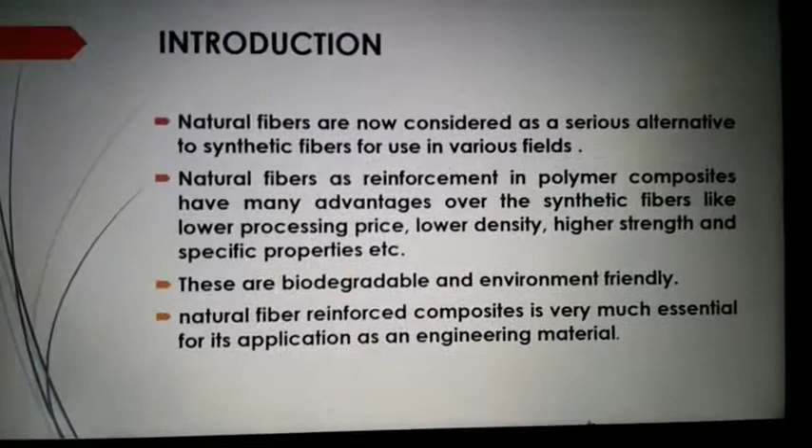Here is the introduction. In this introduction, we are going to get knowledge about natural fibers. We also know that natural fibers are a serious alternative to synthetic fibers for use in various fields.

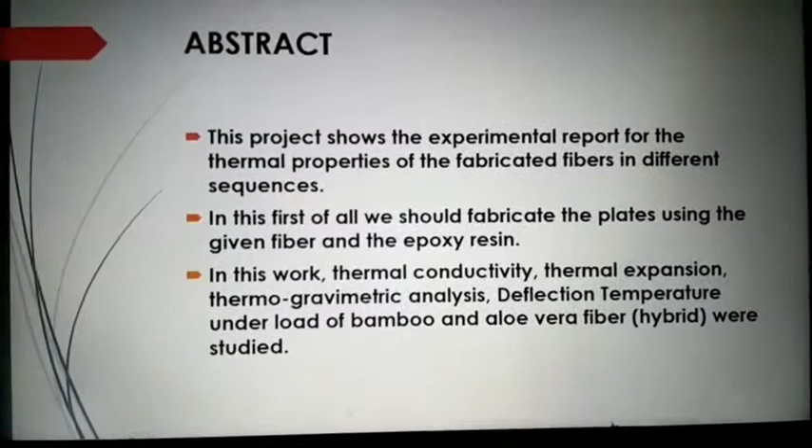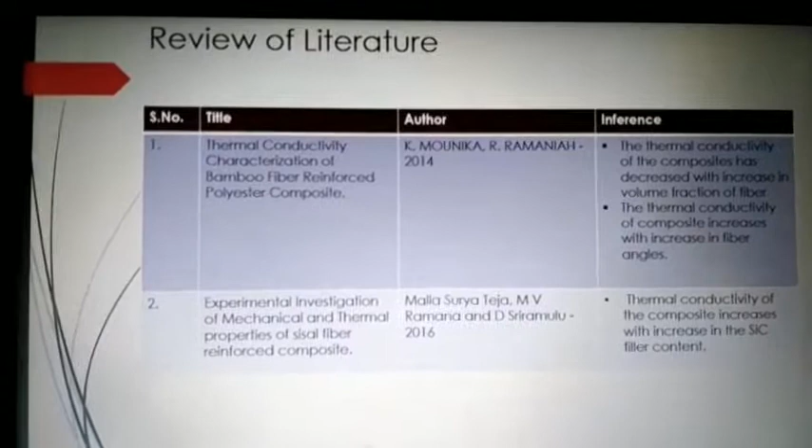Here is some survey we did on composite materials, like conductivity characterization of bamboo fiber reinforcement polyester composite by K. Mounika, R. Ramaniah, and others like this.

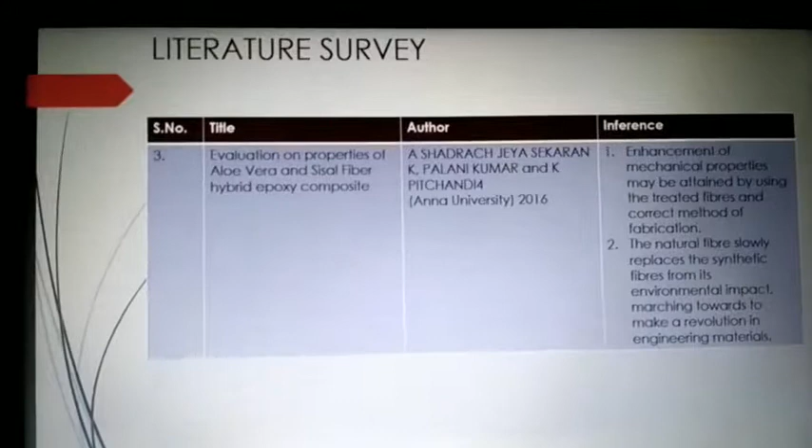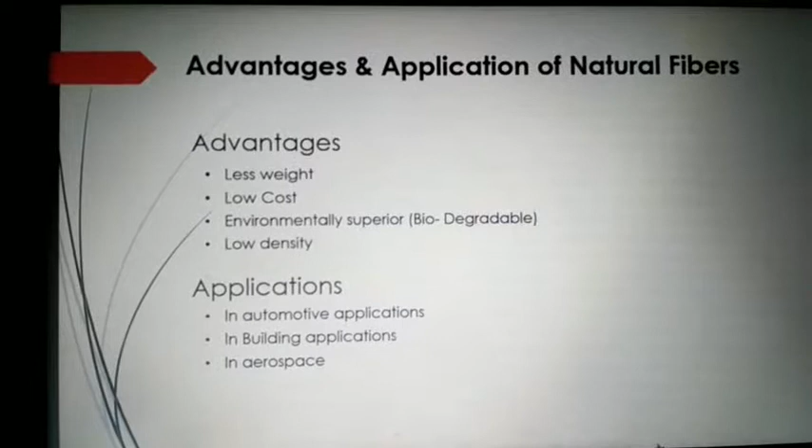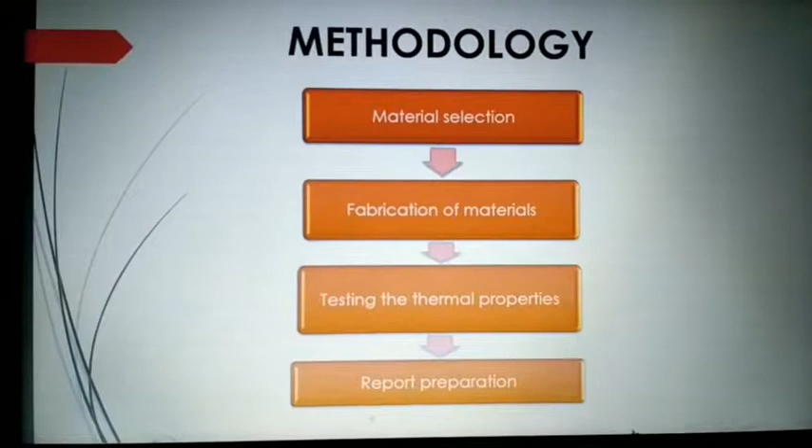And we are using hardener. Then after this, we had fabricated by the help of a mold, and the testing we had done.

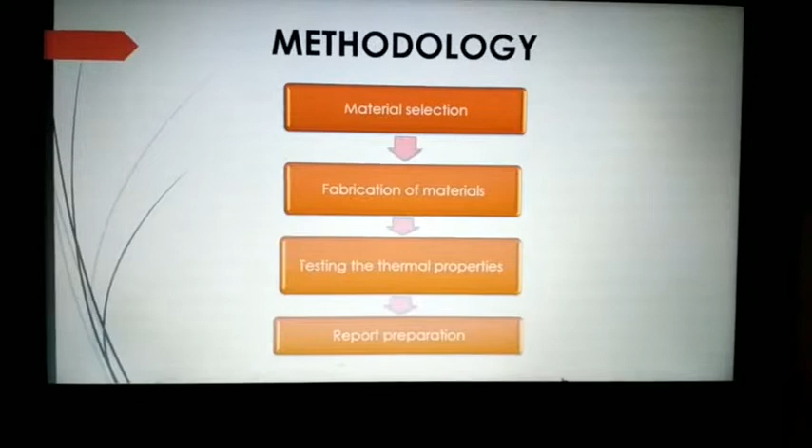There are four thermal tests we had done: thermal conductivity, thermogravimetric analysis, thermal linear expansion, like this. And then we have prepared the report.

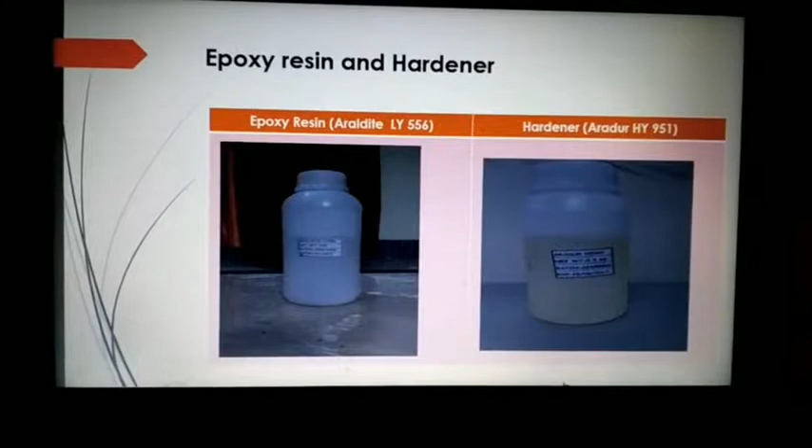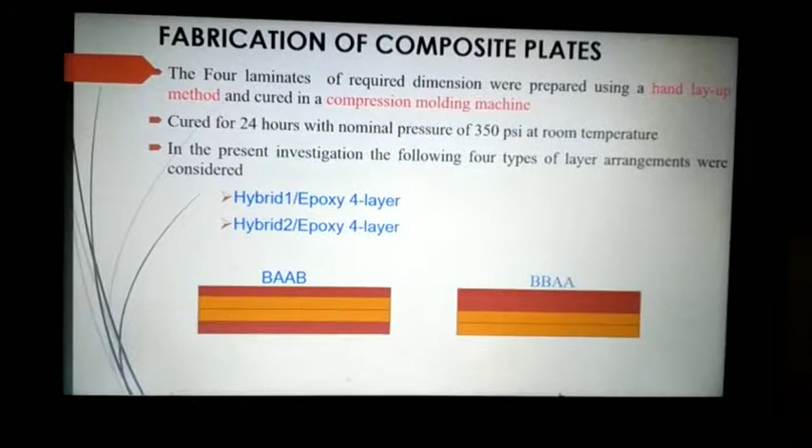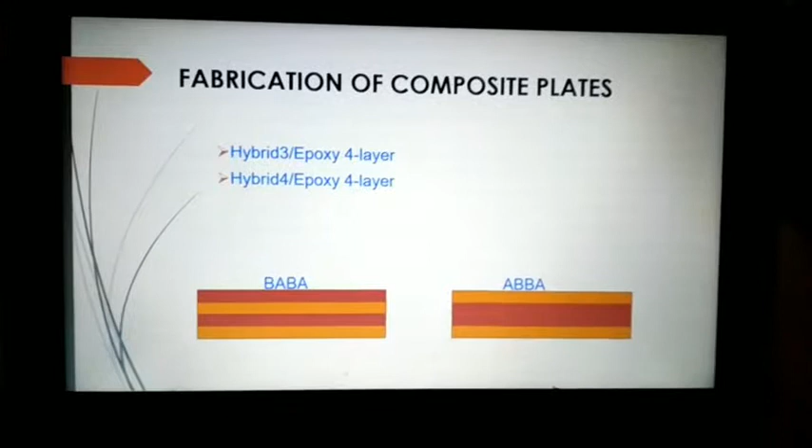Actually, we made four compositions: one is BAAB, one is double B double A, one is BABA, and one is ABBA. Here A denotes aloe vera and B denotes bamboo.

And we did the fabrication by the hand lay-up method. Here is a diagram for the hand lay-up method.

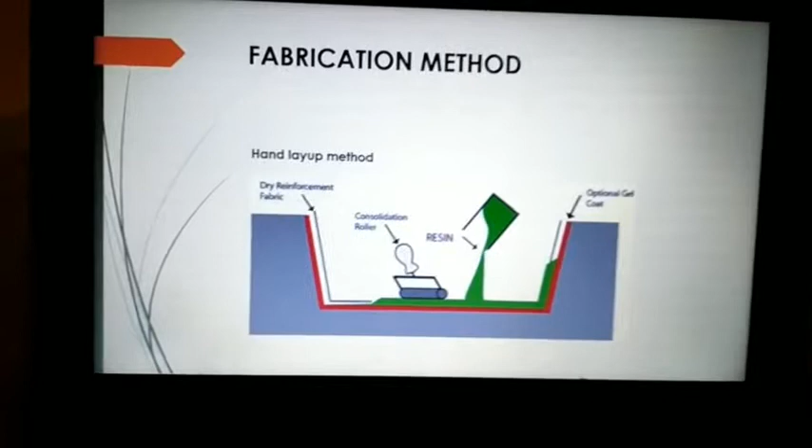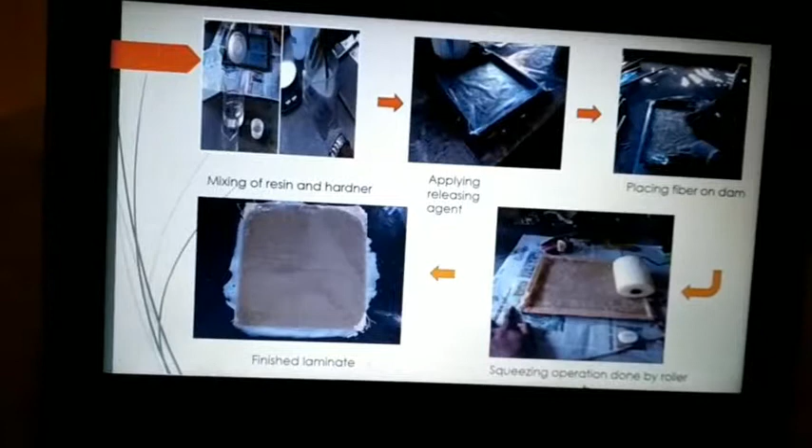And these are the various steps for the making of the material. Here first we mixed hardener and resin.

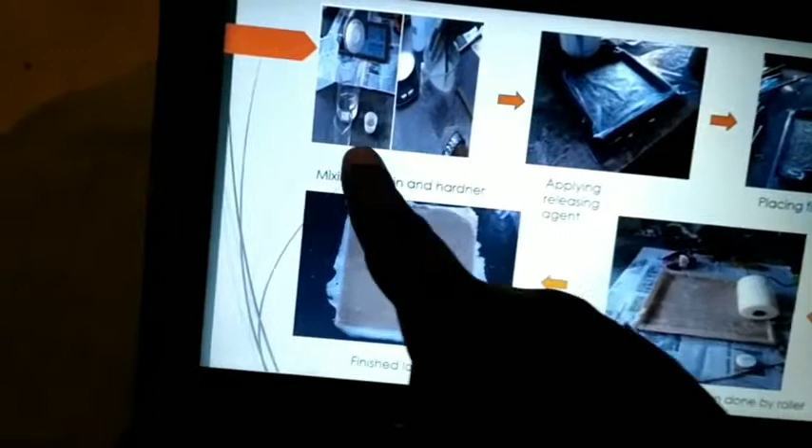We made it by the rule of mixing, meaning we are using 10% hardener, so 10 is to 1 ratio we are mixing it.

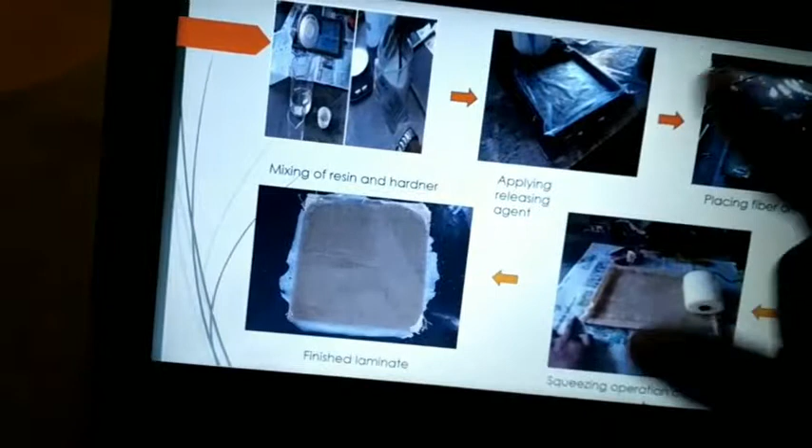Then first of all we take the mold and we are using a laminate sheet, then a releasing agent, and then we are putting our sheet, and then on the sheet we are putting the mixture of hardener and resin.

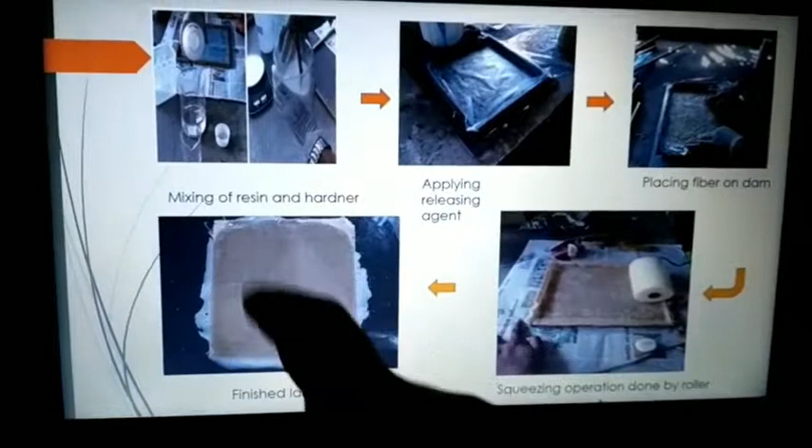And after that we are getting like this, and then with the roller we are fixing this. This is a pic of our mold.

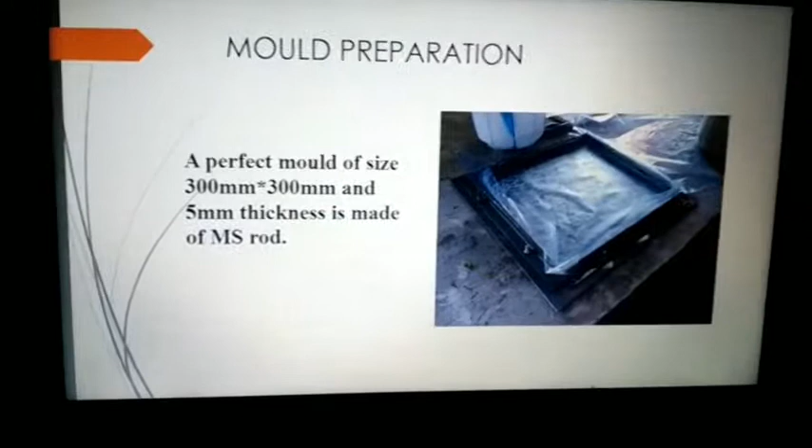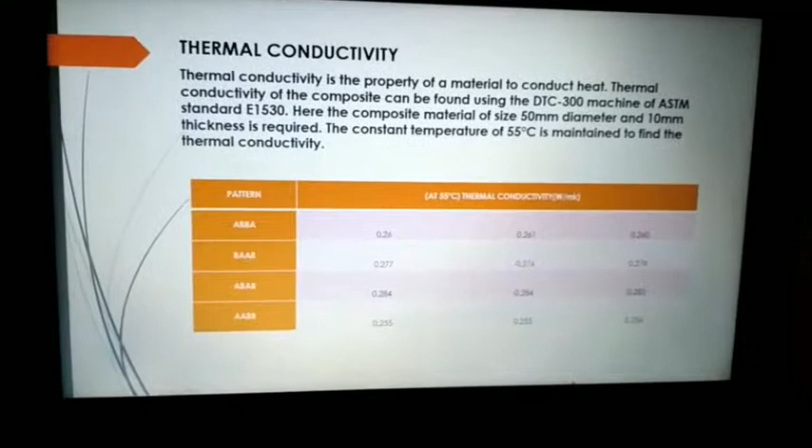And this is the result we got. Actually, we had done all these tests in CIPET. We got the result from CIPET only.

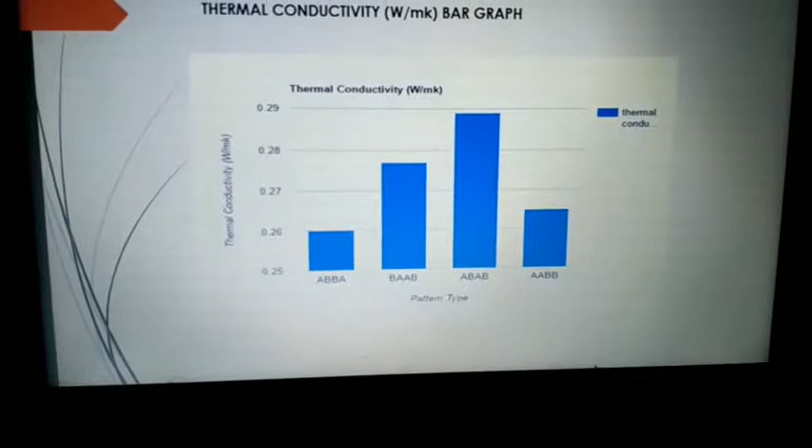This is the thermal conductivity result for different materials, and we drew a bar graph also. Here we can see that ABAB has the maximum thermal conductivity.

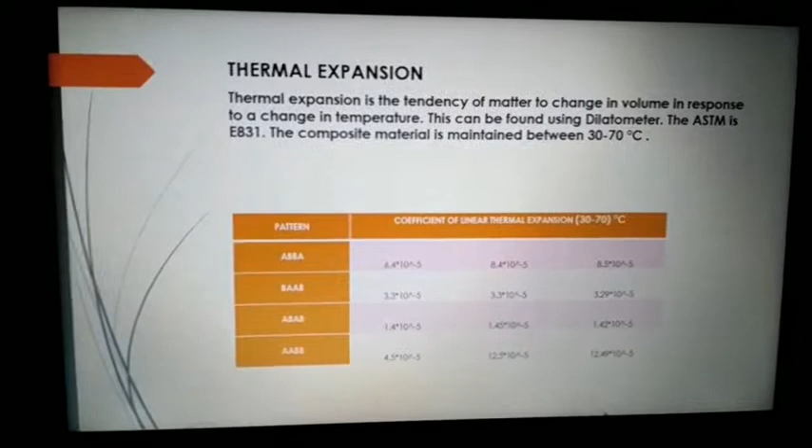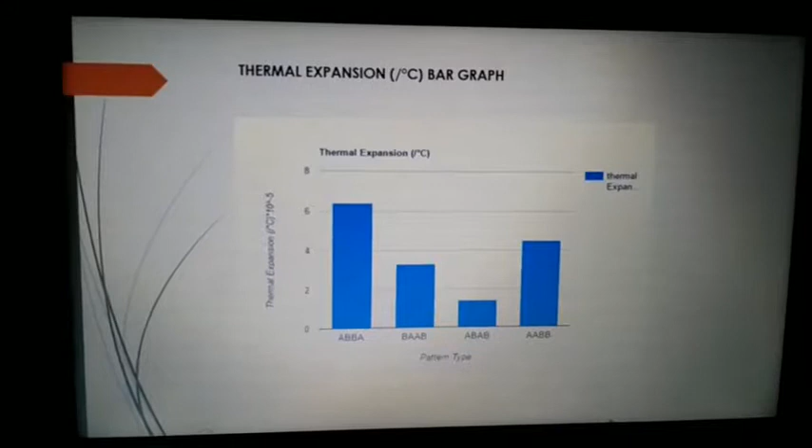And these are the results for thermal expansion. This is the thermal expansion bar graph, and you can see that ABAB has less thermal expansion.

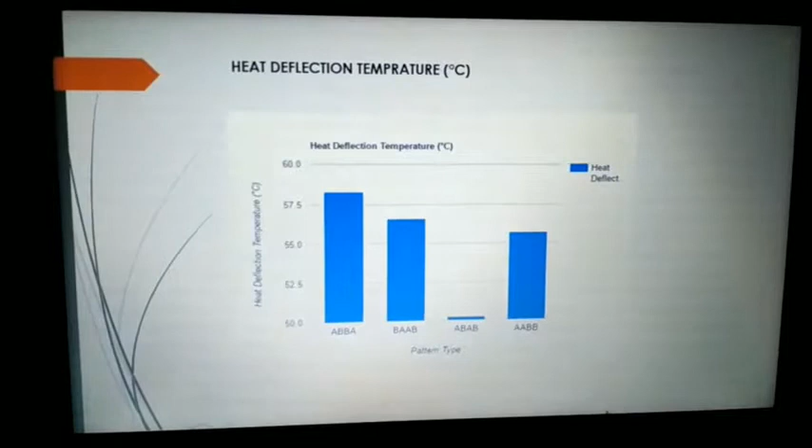This is the result for heat deflection temperature. You can see that ABAB is deflecting very little heat.

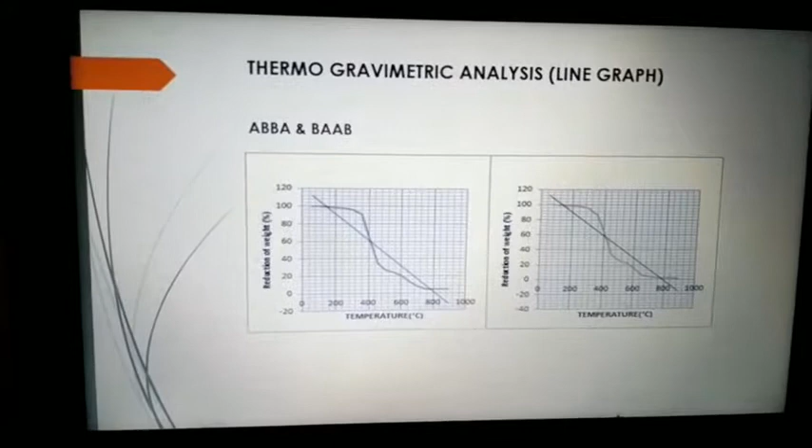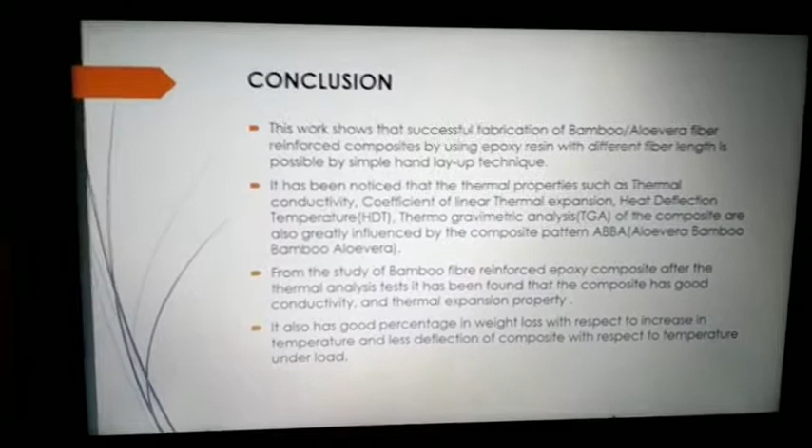These are the conclusions, and after all the conclusions we can get that ABBA is the good one. Thank you for watching this video.